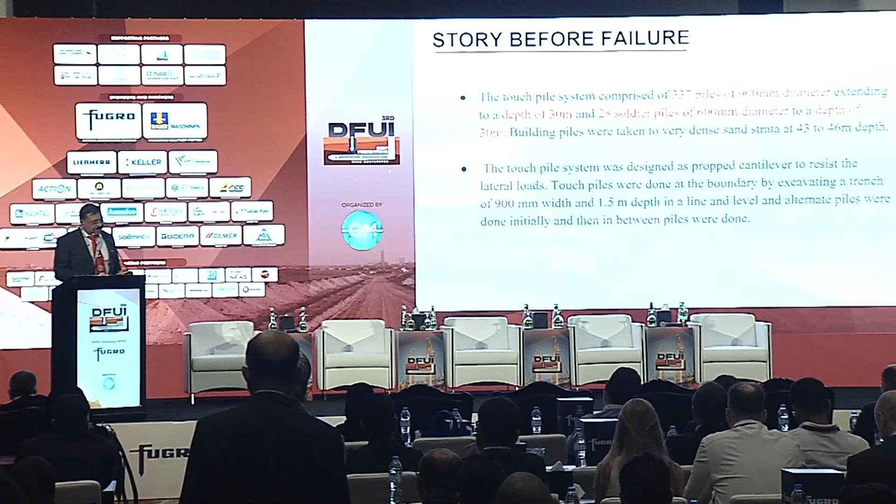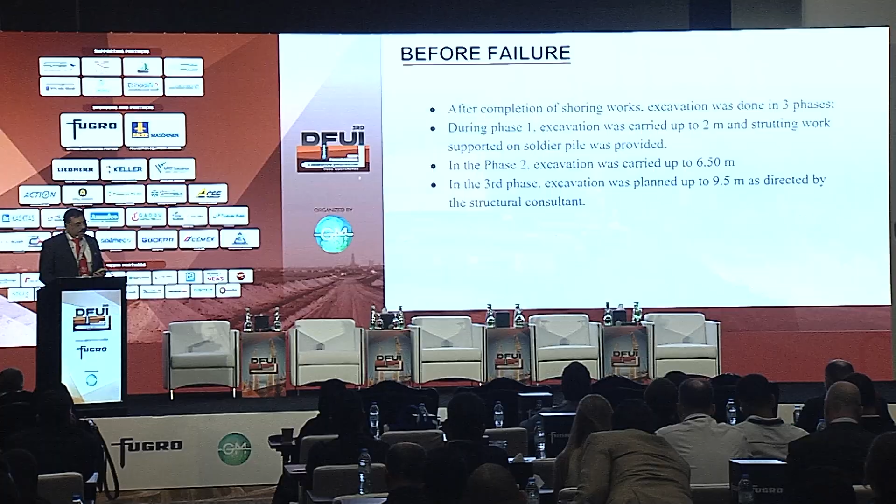So this was the condition. The work was done in 3 phases. During phase 1, excavation was carried up to 2 meters after the touch piles were done, and a strutting system supported on soldier piles was provided. In phase 2, excavation was carried up to 6.5 meters, and in phase 3, excavation was taken up to 9.5 meters, from where the foundation had to start.

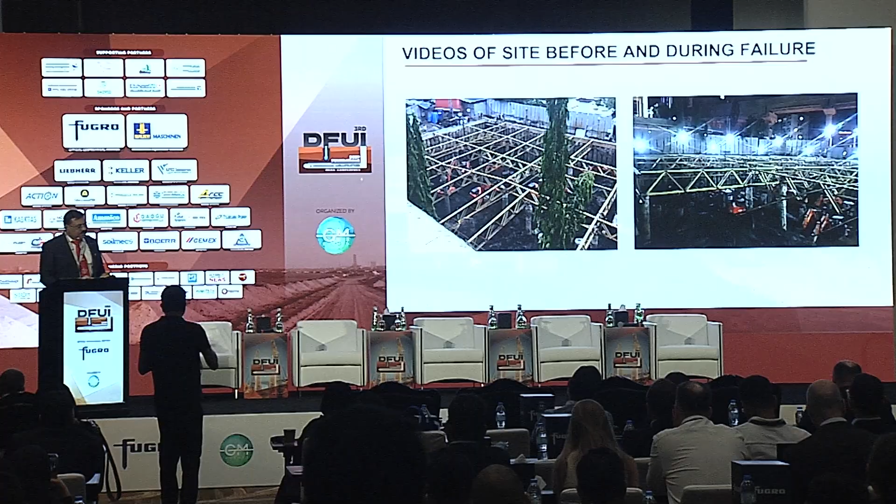Let's see this video. This is what was happening on the previous evening when the work was going on. The monsoon was about to arrive and they wanted to speed up. Let's see what exactly happened about 1 hour after this incident.

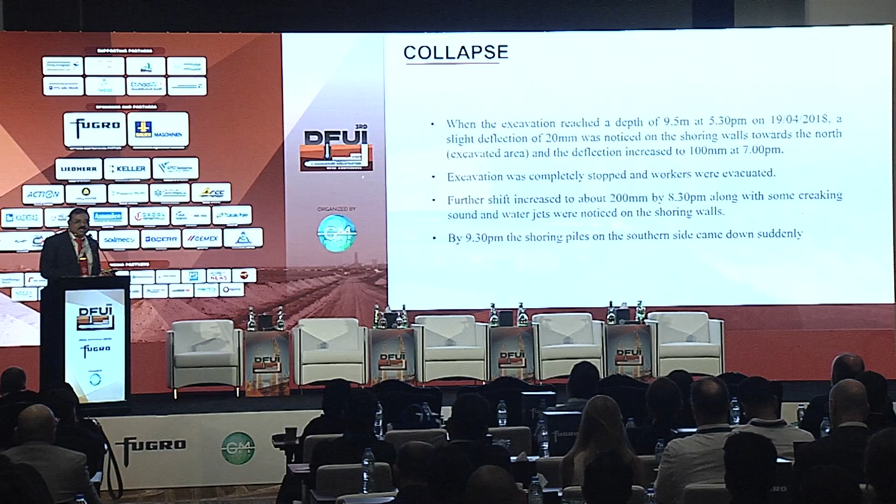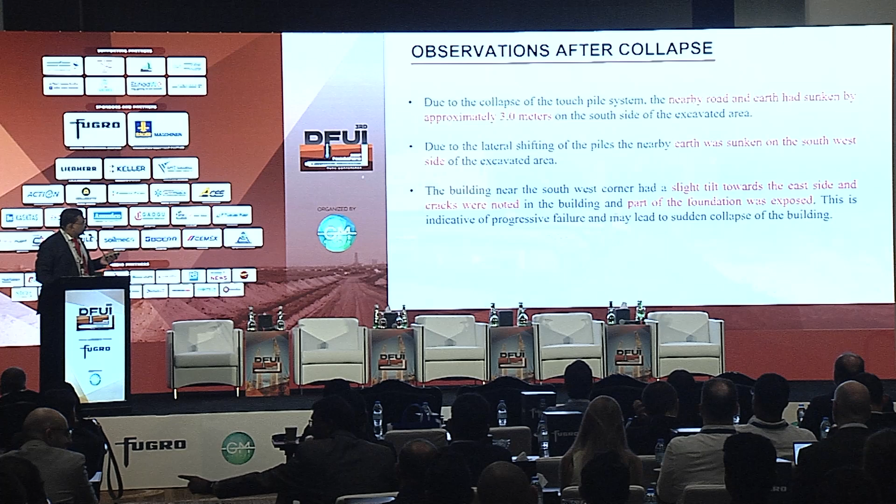A committee was formed to study the reason for the collapse of the touch pile system, verification of government approvals, and suitability of the touch pile system for further construction. So this was the initial step taken.

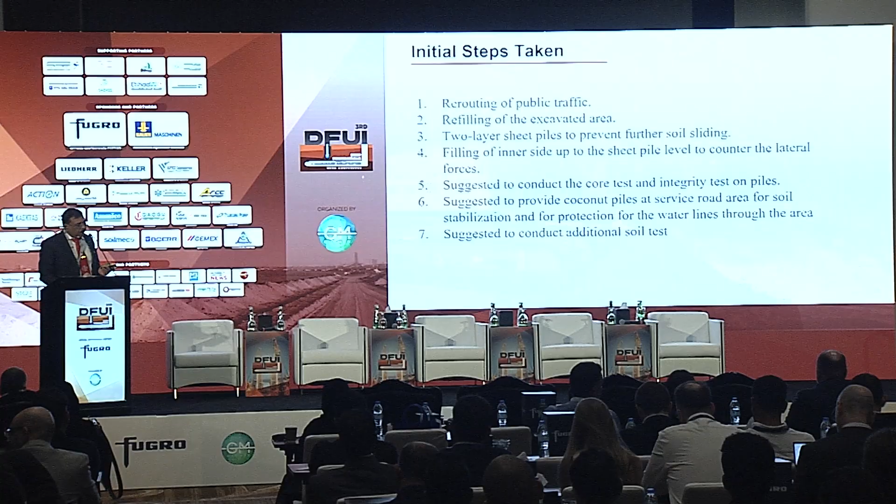We rerouted the public traffic, refilled the area, two-layer sheet piles were provided, and all the testing was carried out - core test, integrity test - to understand where the failure happened. It was modeled in Plaxis as well as CAD to understand how the behavior was happening.

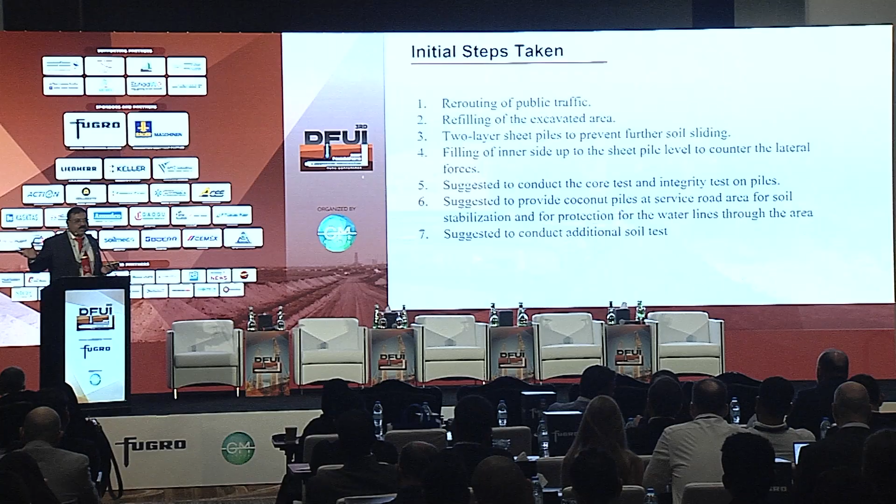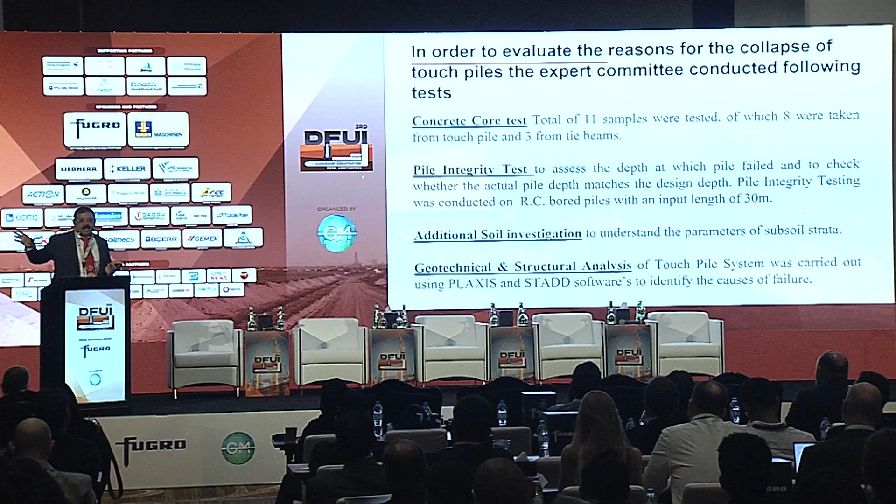Pile integrity test showed that the depth of failure had moved - even though it was only 10 meters, due to the liquefaction process, the unsupported length became 15 meters - and the collapse due to the jump of moments happened because of that.

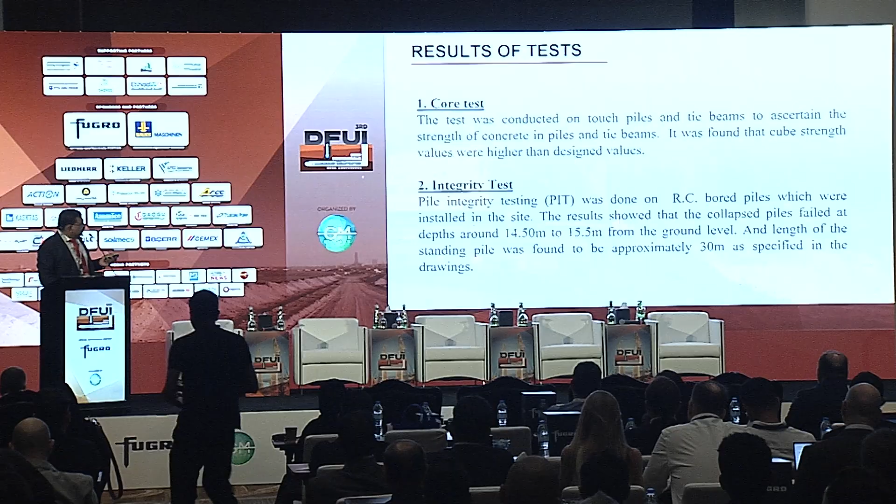Additional soil investigation was also carried out, and Plaxis and STAAD software were used. So this is the testing being carried out, and these are the core samples retrieved. Integrity test - this is what I showed.

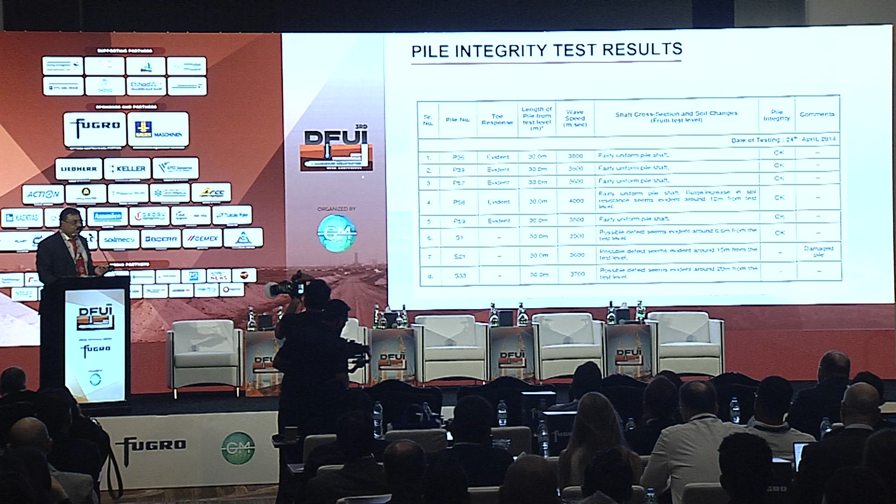The point of fixity had moved down to 14.5 to 15.5 meters, and the 30 meter pile failed. These are the results of the integrity test which was carried out, and here you can see the sudden change in behavior which led to the collapse.

And this is the soil profile. A very weak subsoil profile was the major root of the problem.

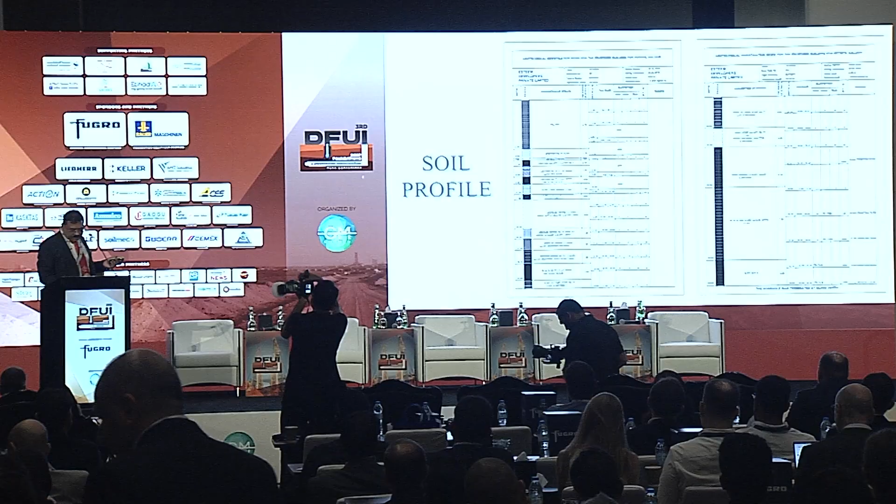Now we had to get into the drawing board, study what exactly went wrong, and stage analysis was carried out. So this is the basic equation where we started working, and we worked out the capacity of the pile to withstand.

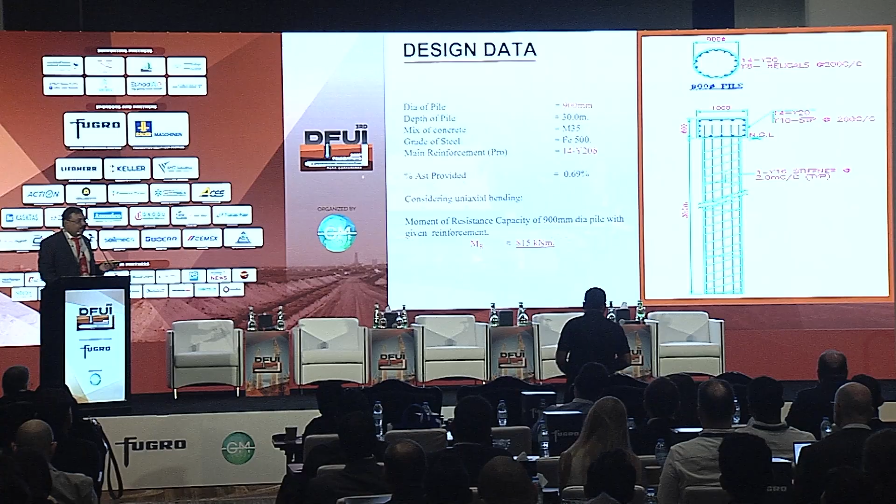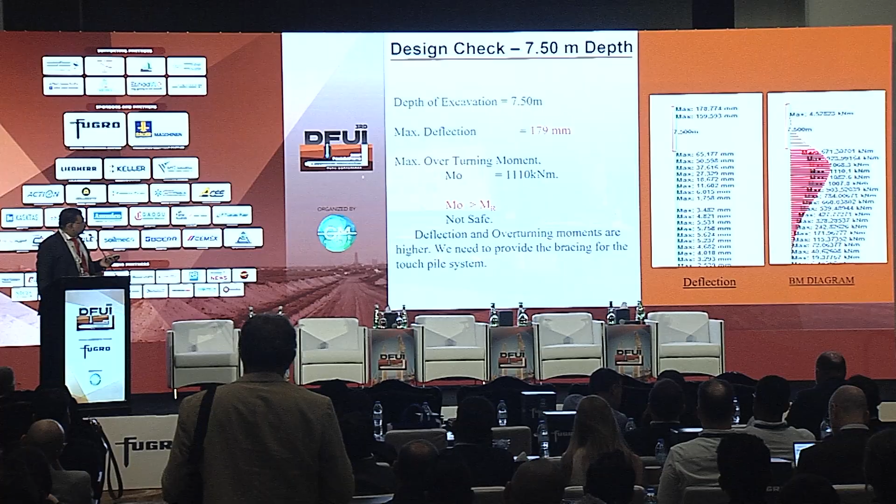You can see that it has a capacity of 815 kNm. So we did stage analysis - what will happen at 5 meter, 6 meter, 7.5 meter, 9.5 meter. At 5 meters everything is safe, at 6 meters the factor of safety is still 1.3, at 7.5 it was borderline - deflection and overturning moments were high, and bracing had to come into action.

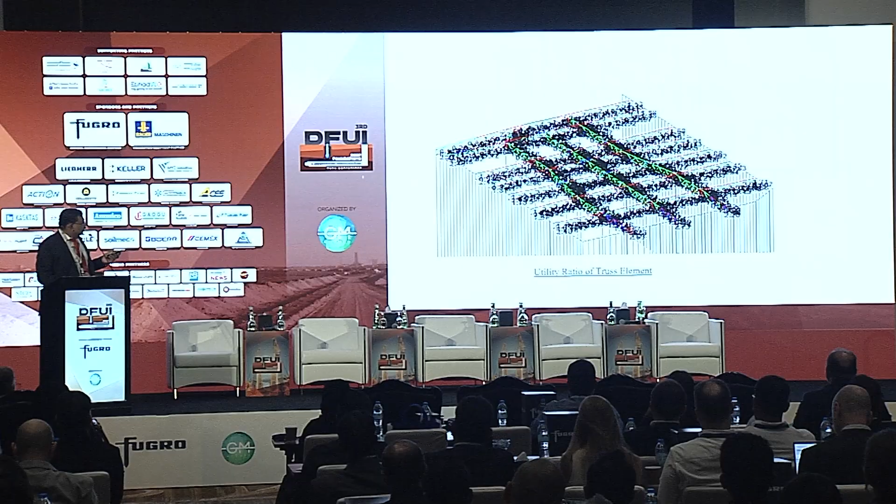And this is the bracing system which they adopted. We simulated it in the model, and we worked out the utility ratio, and at 9.5 meters there is a sudden jump of moment, and the pile is not capable of withstanding once the bracing system fails.

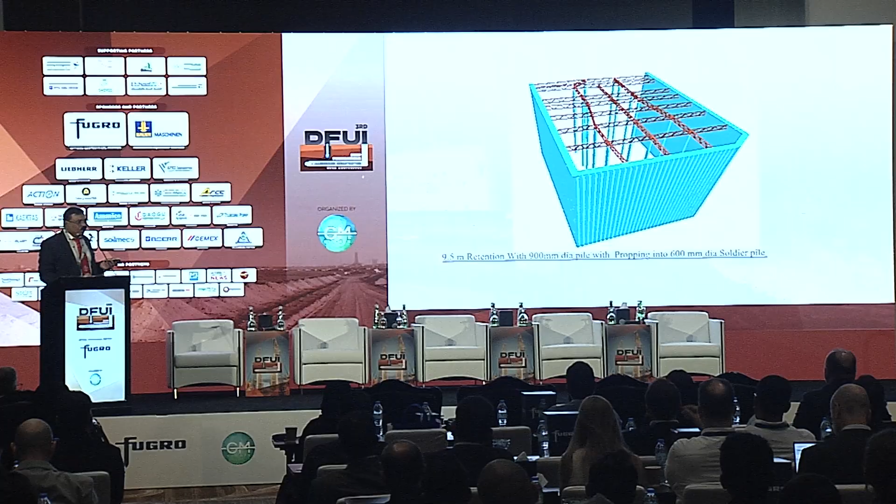So this is the three-dimensional model of the system generated to study the behavior. After the in-depth analysis, we found that inadequate strut system, soft soil, yielding of soil, high thrust from shoring pile, and increase in unsupported length of pile led to the failure.

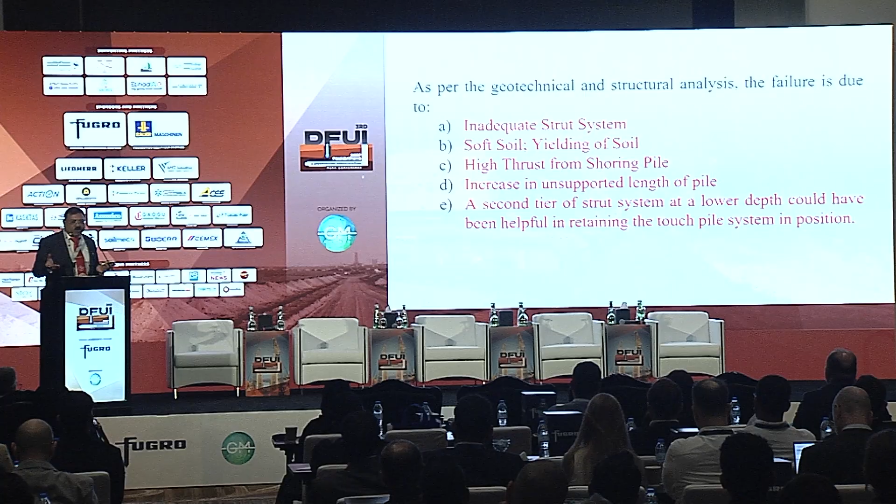A second tier of strut system, if provided, would have avoided the failure. So this was the final conclusion. And it was sheer luck that there was no human casualty during the incident.

Work was carried out by providing additional piles and additional supporting system. We asked them to give more setback from the road. Instrumentation was carried out extensively, and the work is completed - the building is operational now.

So this is one case study, because whatever is in theory doesn't work in the field. You have to monitor properly and take action as and when things happen. That's a very important aspect when we are getting into the design.

My second story is that of a demolition - demolition of a high-rise structure by delayed detonation technique. We put explosives in different parts of the building. We go there. If I take the theory, it is very simple.

Step one: survey the surrounding area, study the building plan, remove toxic substances like asbestos, flammable material, etc. Remove non-load bearing wall - why?

Because I want to have less impact of load hitting the ground, so you remove the non-load bearing wall, drill holes in columns, put your explosive, move away, press the button, building comes down. Very easy in theory.

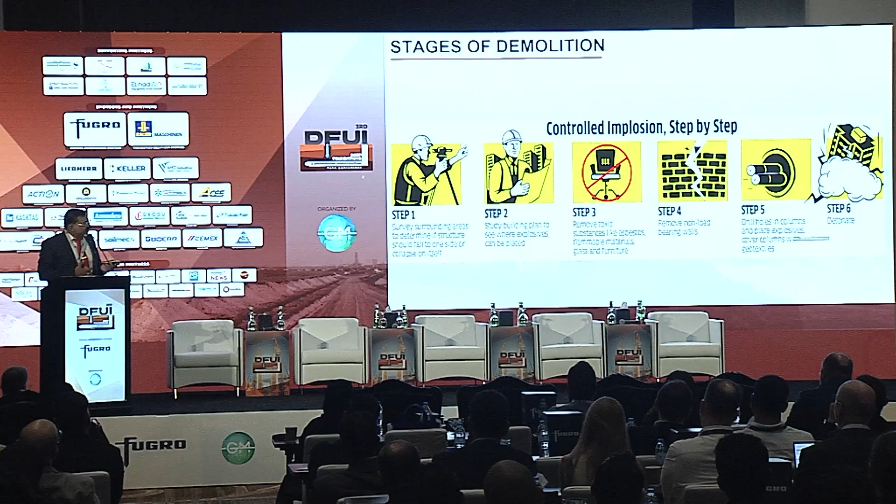But when you do it practically, there are so many butterflies in your stomach. You are not sure whether you have to press it or not when the time has come. So let's see this video.

Good evening. The implosion dominates tonight's special edition of 10 Capital News. We begin with the disastrous aftermath of yesterday's implosion. It's estimated a crowd of 100,000 people lined Lake Burley-Griffin to witness history. What followed will be etched in the memories of us all for years to come.

Organisers had intended yesterday's demolition to be spectacular. They couldn't have imagined the traumatic effects it would have on the national capital. Instead of a safe, fully contained implosion, boats on the lake and crowds on the other shore were showered with debris, shards of steel warped and twisted by the force of the blast. The 12-year-old girl was hit and instantly killed, 9 others taken to hospital with minor injuries. Even today, no one could tell why the implosion turned into an explosion.

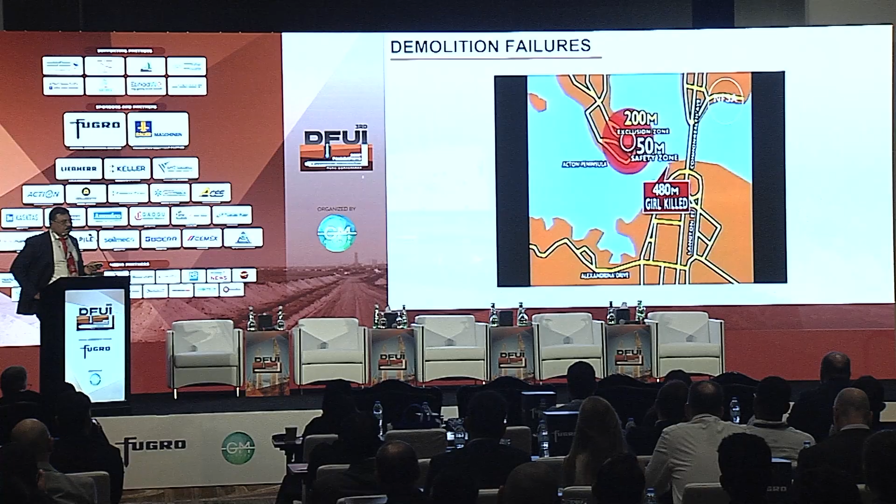It'll be a painstaking and detailed investigation by the police. It's largely a matter, as you'd appreciate, of structural engineering questions, questions of physics, to determine the cause of the fatality and the injuries that were occasioned. The girl was killed 480 metres from the demolition site, nearly 10 times the prescribed safe distance set down by contractors. But today, witnesses...

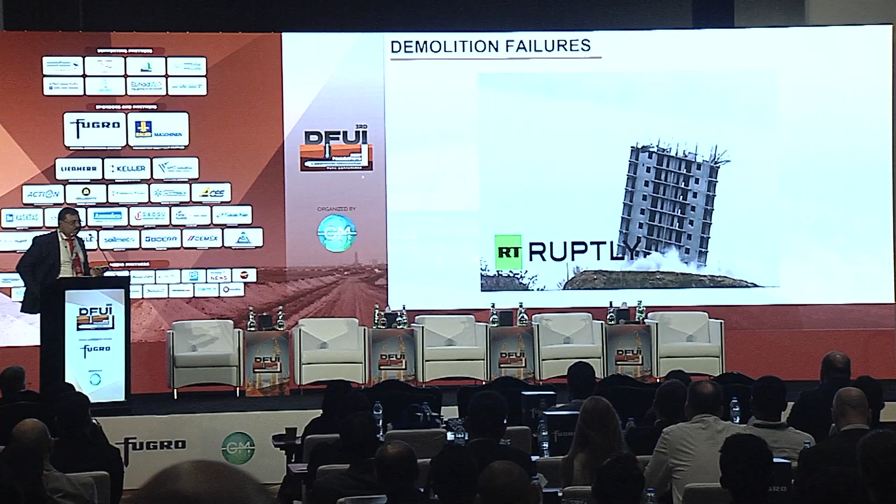So in the previous case we saw that the implosion was huge, so the collapse was found to have caused the girl's death and so many casualties happened. And in the second case, they put less explosive.

And always when we work on this project, our team lead is from South Africa. He always keeps telling us, if you don't do good engineering, the building will stand there and laugh at you. So that is what we saw, the building standing there and laughing at the engineers who did the job.

Okay, so now I'm coming to my story. This is the second largest demolition in the world. The first one happened in Abu Dhabi, the Mina Plaza, that is the tallest. So this we did for Supertech Twin Tower Noida.

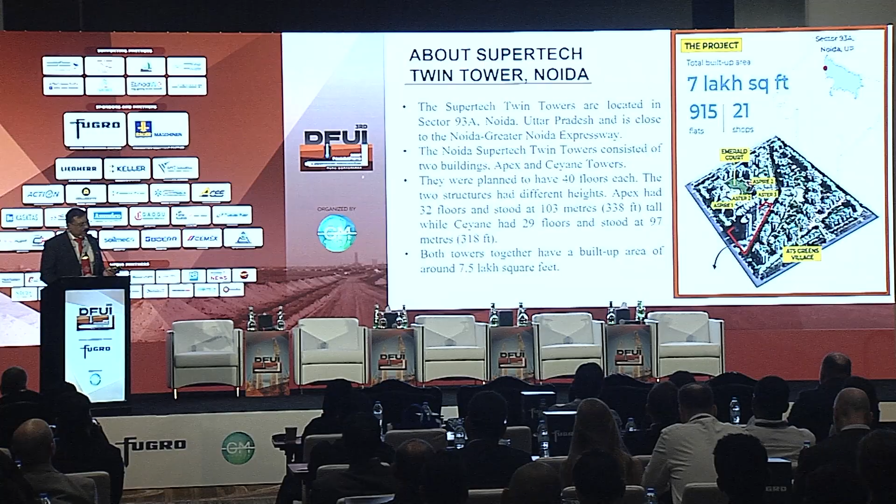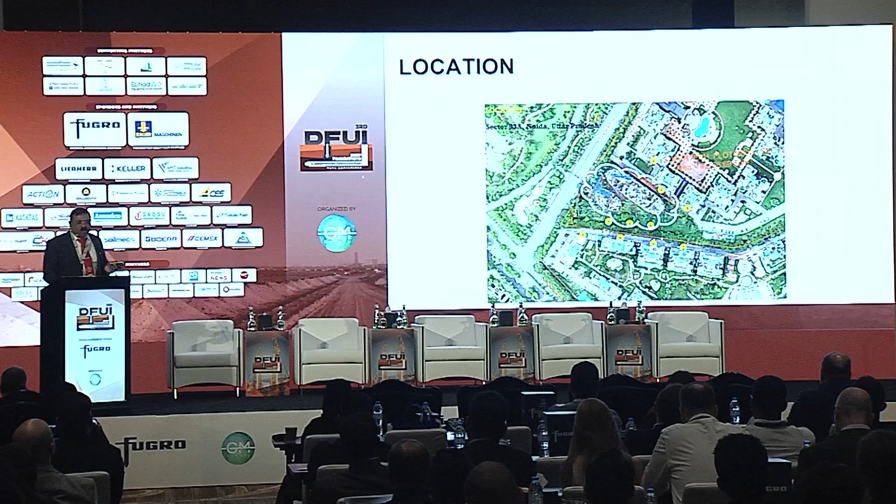A 7 lakh square feet building in Noida was brought down for violating the rules. And this was done, and this is the building. You can see that the building is surrounded by structures all around. And the building is 103 meters tall, and it has to be brought down without affecting that.

And to add more worry to the problem, this is the building which is standing tall and about 60,000 tons. This is the history. And to add more problem to that, we have a live GAIL gas pipeline running just 23 meters away from the structure, and we cannot stop that. And we have to do it, and you get only one chance to do the job. You don't have a second trial.

So this has to be done, and the building has to be brought down, and everything has to be measured, because there will be a lot of court cases happening after that. So everywhere we had instruments placed.

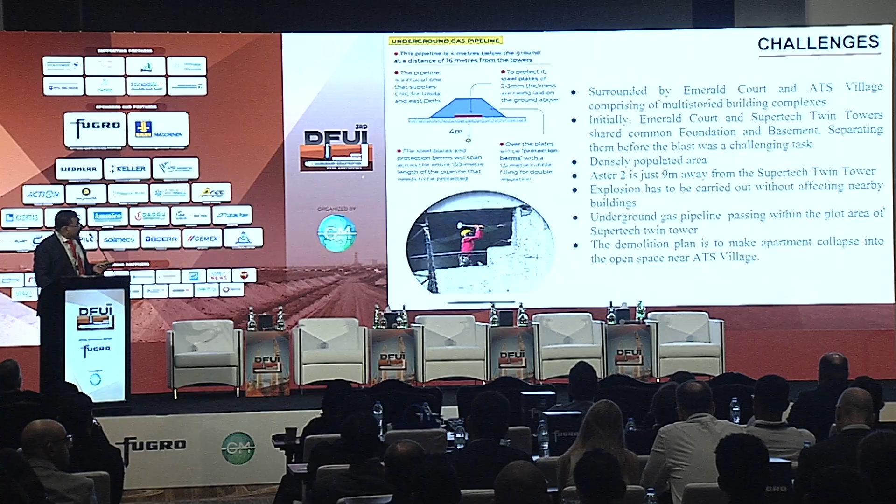The team worked hard. This is surrounded by Emerald Court and ATS Village. Initially, the building, which is a tall story, is just 9 meters away, and we have to get the demolition done without any damage happening. This is the world's largest demolition that happened, that is Union Carbide, but it was by mechanical demolition.

And by implosion technology, this is the second world's largest demolition. And to do this job of a building worth 500 crores of assets, the time it took us was just 9 seconds. But for that 9 seconds, we did 6 months of engineering, 6 months of detailed engineering.

I am based out of Cochin in Kerala. I have to fly 3 hours to reach Delhi. So I used to go there once a month previously, then it was twice a month.

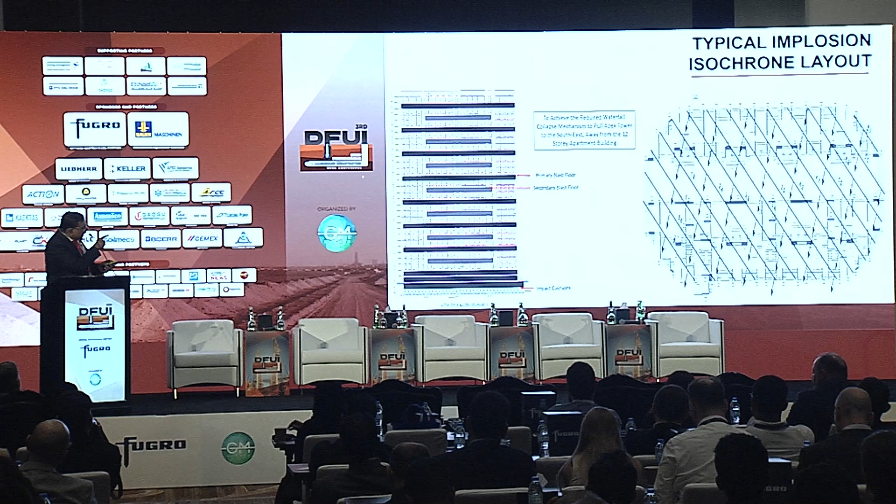Then I was camping in Delhi, and for the last 3 weeks I was at the site to make sure that everything was going on. If you look at the lines, these are the seconds which I need for the implosion to happen.

And the building will come down automatically. We have the primary and secondary blast floors. This was a 9 second operation.

The court instructed that none of the surrounding buildings should be damaged because of this. So a team was assigned to monitor, made video records of all the buildings, did a lot of NDT testing, proved the strength, and everything was documented and submitted to the Supreme Court of Law.

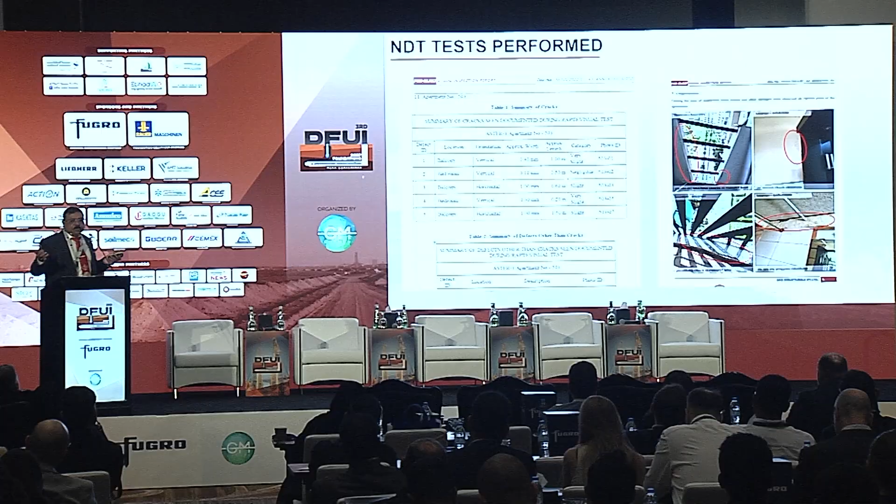Rapid visual instrument assessment was carried out and all these buildings were recorded. Even slight negligible cracks were reported. These are the NDT tests being carried out, and everything was modeled using software.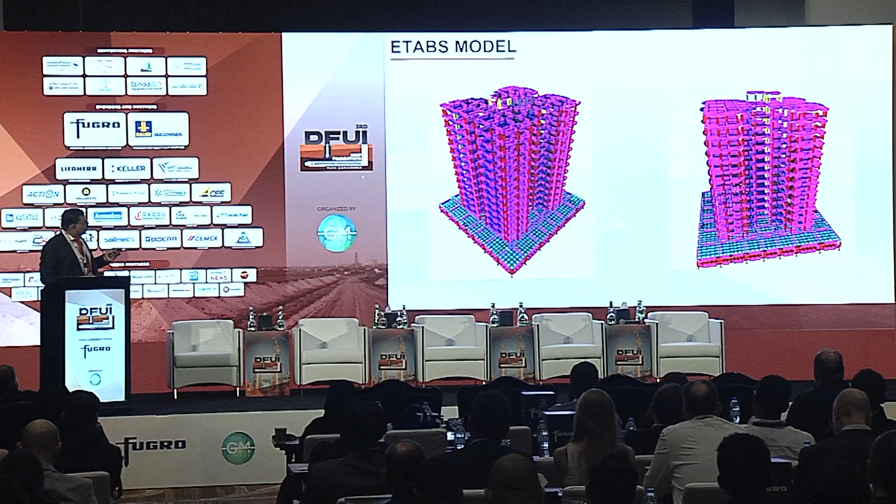Due to scarcity of time, I am not going through all of this in detail. I am here, so if anyone has a doubt, you can come to me and we can discuss. This is the ETABS modeling, simulating the behavior which happens.

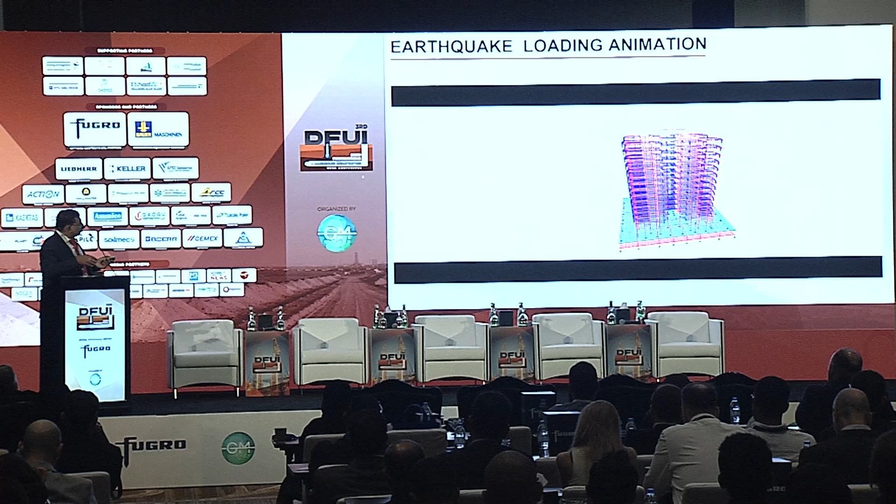What will happen when the impact occurs? What will happen when an earthquake hits during the process? What will happen when the blast load hits? It is simulated in the structure, and you can see how the behavior happens during the impact. This is for earthquake, and this is for the blasting load.

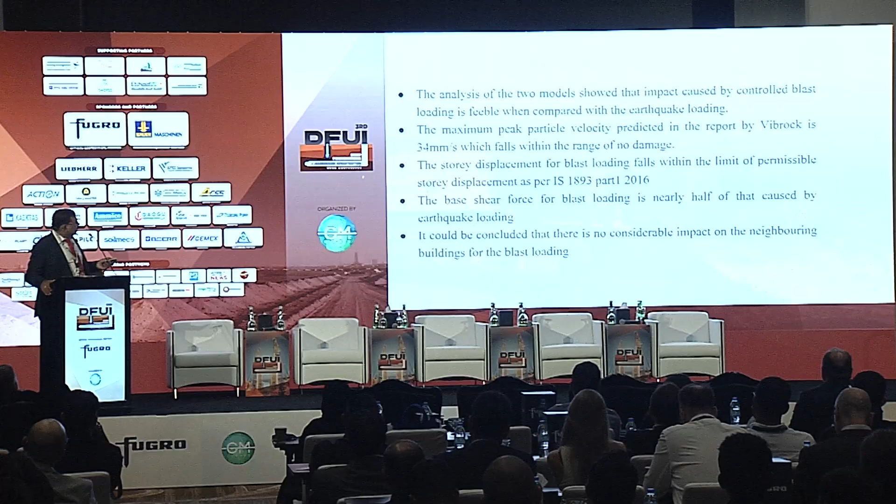So once the blast hits the ground, the building will start moving, and everything was proved and submitted to the court of law that as per design, everything is perfect.

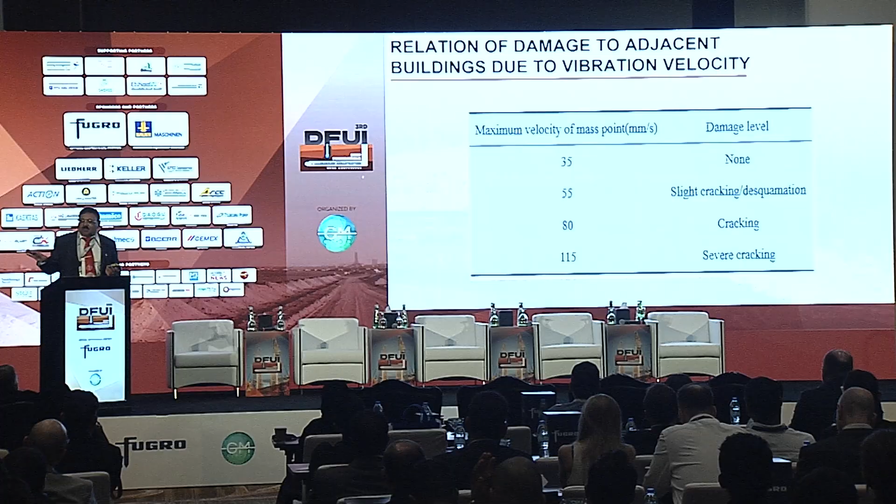Then the D-Day came, and we had to get the button pressed. The technology of delayed detonation is very simple: if I can control my vibration to 3.5 centimeters per second, there is not going to be any damage. If it is more than 11 centimeters per second vibration, there will be huge damage in the surrounding built environment.

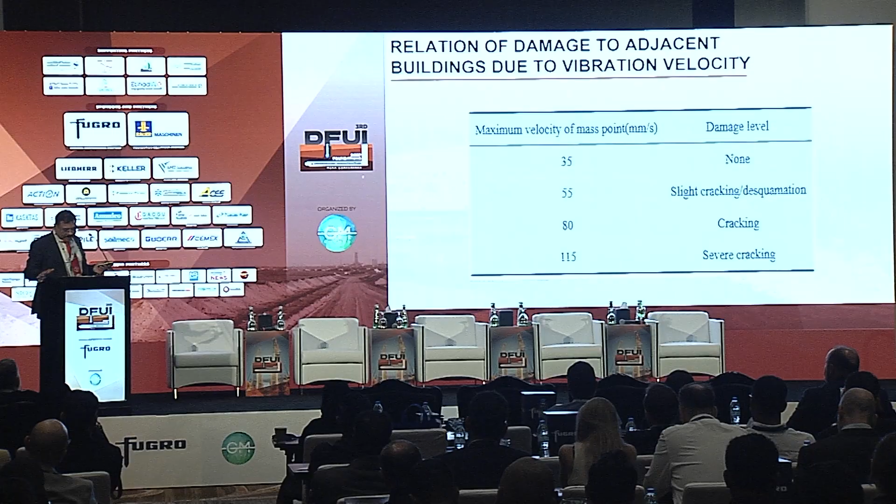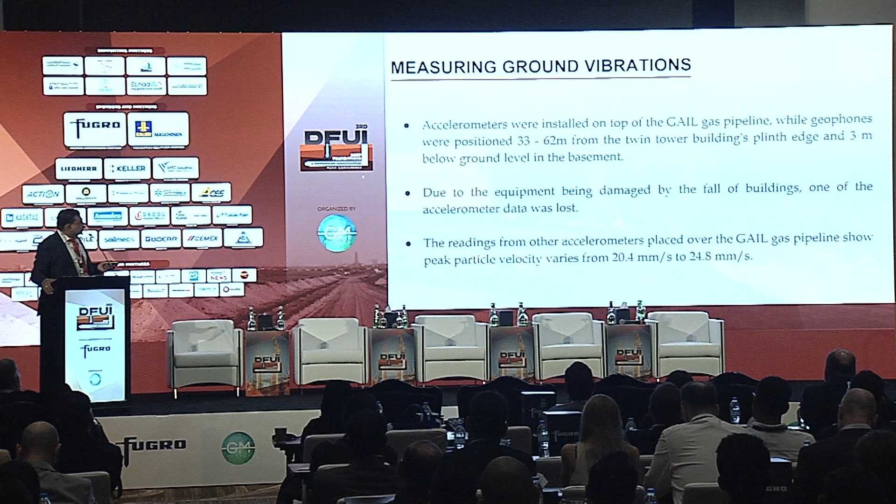We had all sensors connected to the structure to understand exactly what the behavior happening was. This is the GAIL gas pipeline, which was monitored live. So you can see the video, how the behavior happens and how the vibration is controlled.

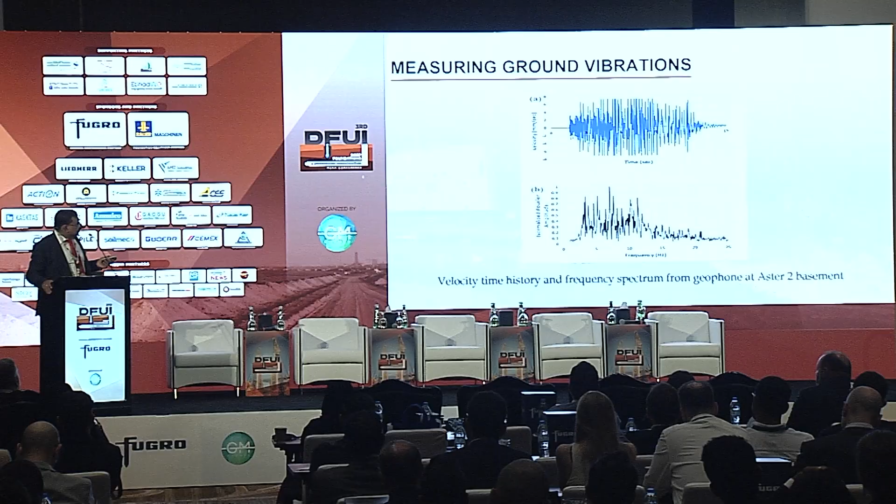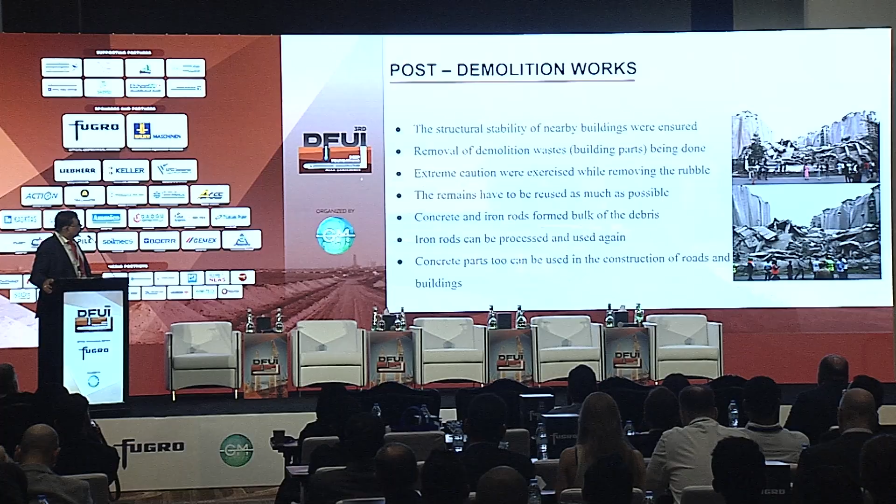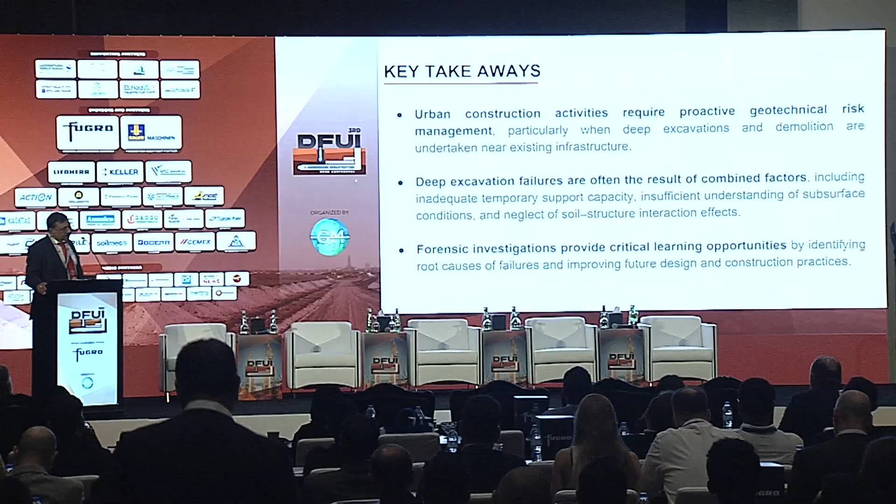Current takeaway: urban construction activities require proactive geotechnical risk management, particularly when deep excavation and demolition are undertaken near existing infrastructure. Deep excavation failures are often the result of combined factors, including inadequate temporary support capacity, insufficient understanding of subsurface conditions, and neglect of soil structure interaction effects, which was very much discussed today.

Forensic investigation provides critical learning opportunities by identifying root causes of failure and improving future design and construction practice. Protection of critical infrastructure during demolition demands meticulous planning. Instrumentation and real-time monitoring are indispensable tools. An integrated approach involving design, execution, monitoring, and review significantly enhances construction safety and resilience in urban environments.